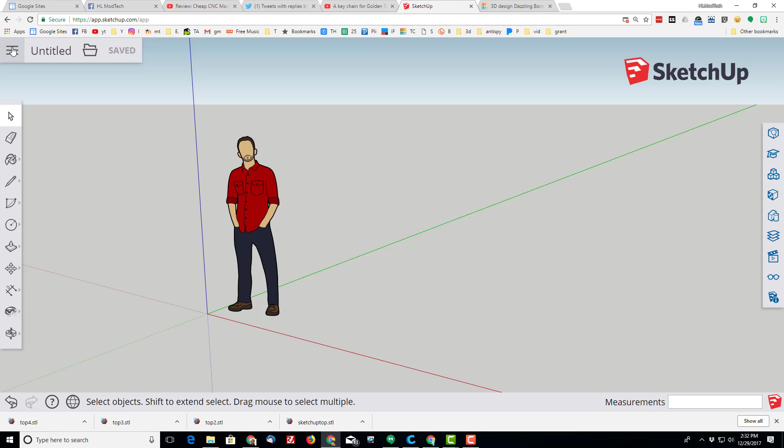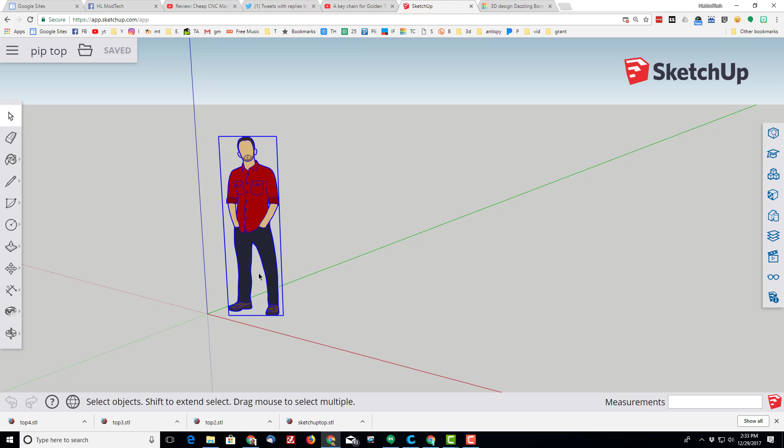This one's going to be a 3D printable project, so make sure that you do new model and get your simple template millimeters so that way it'll print accurately on your 3D printer. We need to give it a name, and I'm going to name it Pip Top, where Pip means print in place. So I'm going to try and build a top that prints in place and does not have any supports. I'm going to click on this gentleman and get rid of him at this point.

I'm going to switch to the circle tool using the tools. Remember, SketchUp is a click and release program. So right now I'm going to click the origin, and then after a little bit of testing, I have found that if I go for a radius of 4 millimeters, that's good enough for me to print with. I then want to click the zoom to extents tool so I can see that cool little circle I made.

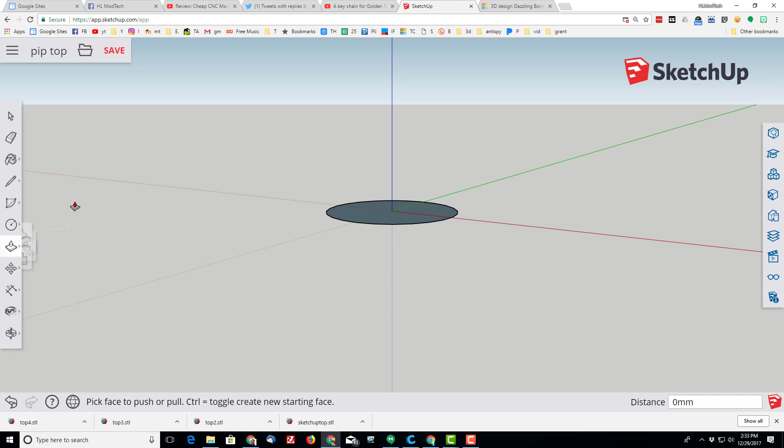I'm going to switch to the push-pull tool, and I would like my handle that I hold to be 25 millimeters high. I am going to use the select tool to grab that entire object, and I'm going to right click and I'm going to make it a group so that it stays together. I'm going to note the red save button and I'm going to hit save.

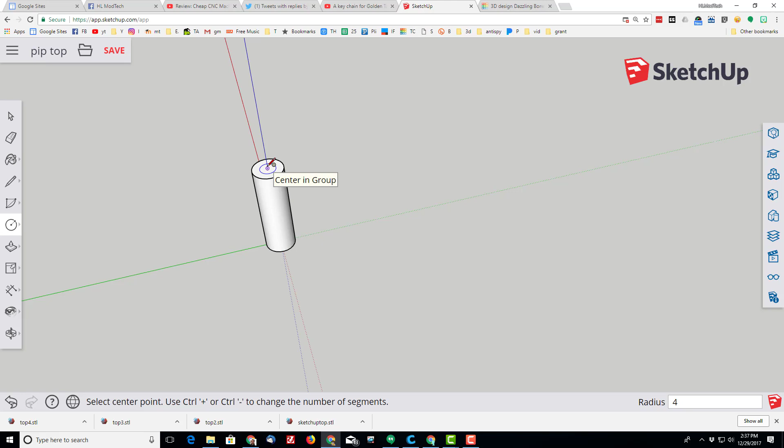And this time I'm going to click right near there. I'm going to hover near the edge so I can snap to the middle. And I'm going to make it exactly 4 millimeters again. I'm going to push-pull that piece up, and I want it to be 10 millimeters high. I'm going to switch to the select tool, and then I'm going to find the amazing scale tool.

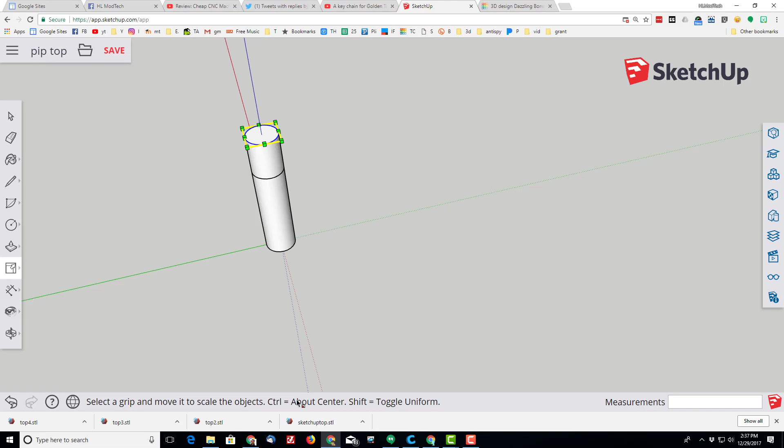And with scale selected, I'm going to toggle uniform, so that means that it goes the same amount in each direction, and then I want it to go around center. And I'm going to pull mine out to 4 times as big. That gives me a nice slope that I can then take a look at using the orbit tool. So you can see that my top will be able to print evenly out and up without requiring any supports.

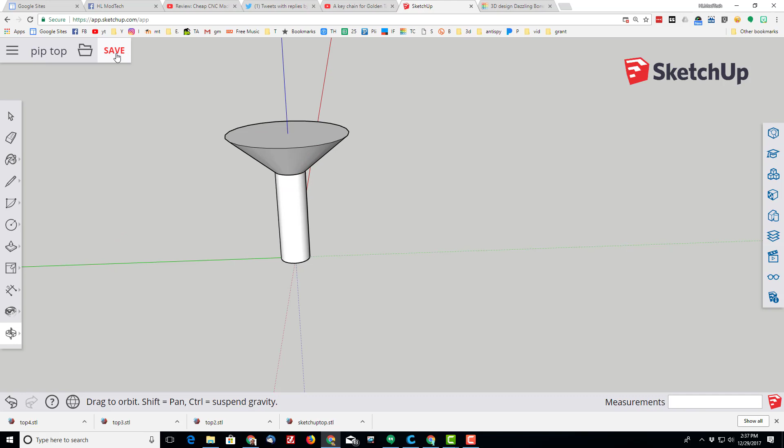I'm going to hit save. I'm going to select those parts. Notice because I drag from the left to right, it only grabs that component. And I'm going to make it a group. Alright, I want to make this so that it's a little rounded before I put the point on it. And I'm going to do that by adding another circle.

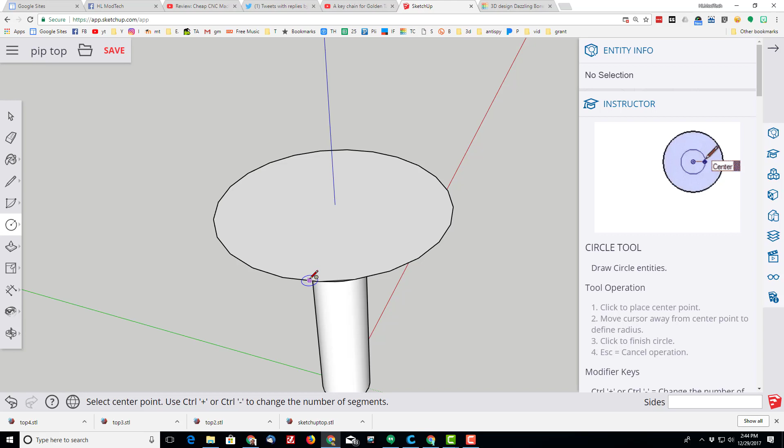I'm going to hover on the edge and that lets me snap to the middle. I'm going to make my circle almost as big as the whole design. And then I'm going to do one other little item to make sure that it's nice and rounded. I'm going to make that 60 segments around. Notice it's a much better curve at this point. I'm going to bring out the push-pull tool and I'm going to push it up 4 millimeters.

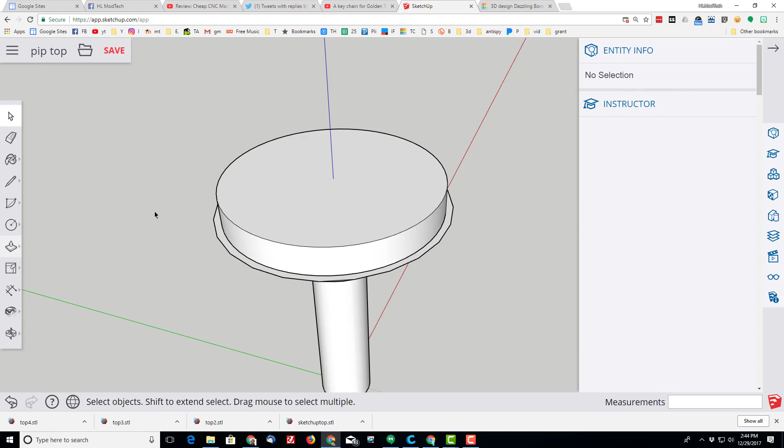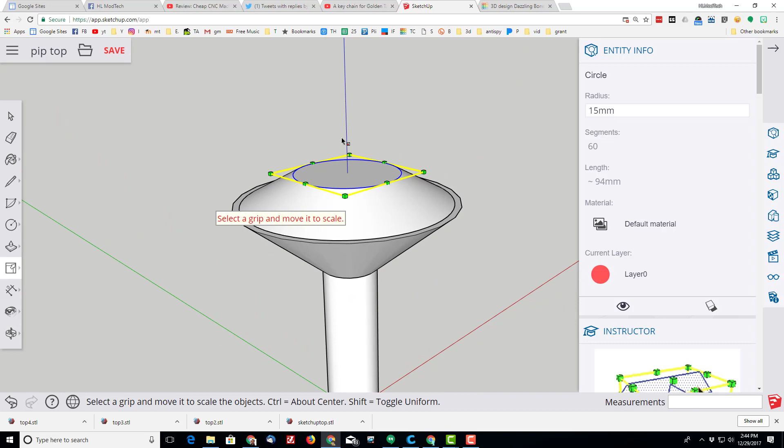I'm going to click on the ring, and then I'm going to choose the scale tool. I'm going to once again turn on shift, and then I'm going to hold down the control key so that it goes about its center, and I'm going to make it down to about half as big as it used to be. That's a decent place for where I'm going to put the point, and it's a nice slope. I'm going to click out here, and then I'm going to grab that entire part. Notice I was touching the other item, but because I didn't grab all of it, it's not selected, and then I can make it a group.

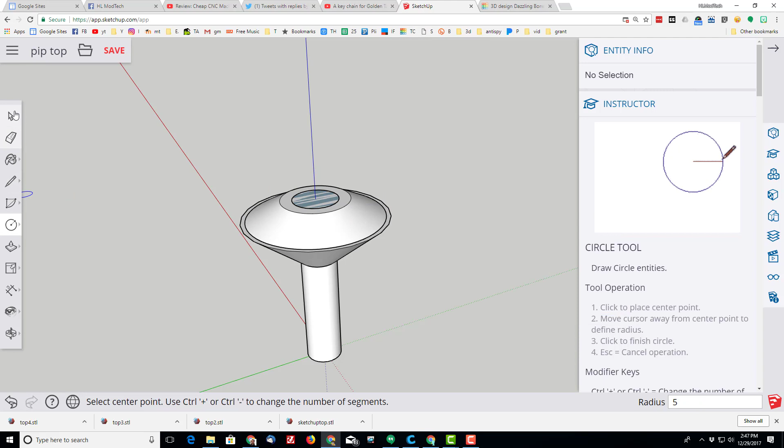Alright, let's add a point to our top, and it is almost ready to print. Click out in space, click back on your circle tool, go to the edge of that circle so that you can then click on the center. I'm going to make it 5 millimeters, but I'm going to do a really cool trick. I'm going to click on the edge of it, and I'm going to change it from 24 segments to 5 segments. So now it's a pentagon.

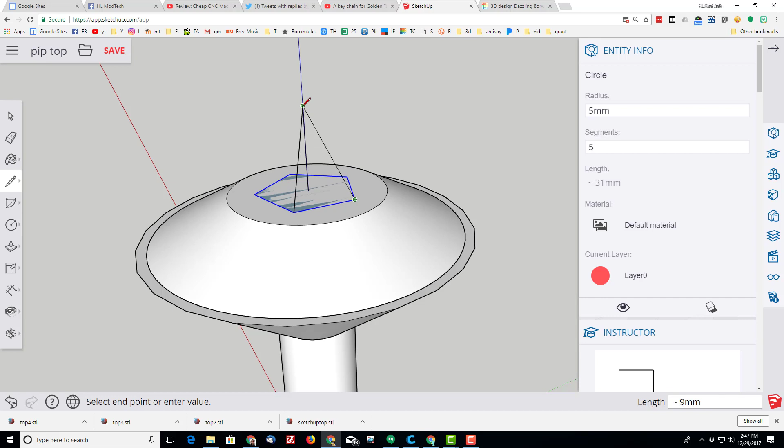And then from my pentagon, I want to go to the edge and then the center. And then on the blue axis, I want to go up 9 millimeters. That lets me connect these faces so that I can turn it into the point that it is going to spin on. I do want to make sure that I get rid of the line on the inside. So I'm going to delete that quick. And then I'm going to go through and connect the rest of them so that it becomes a complete shape again.

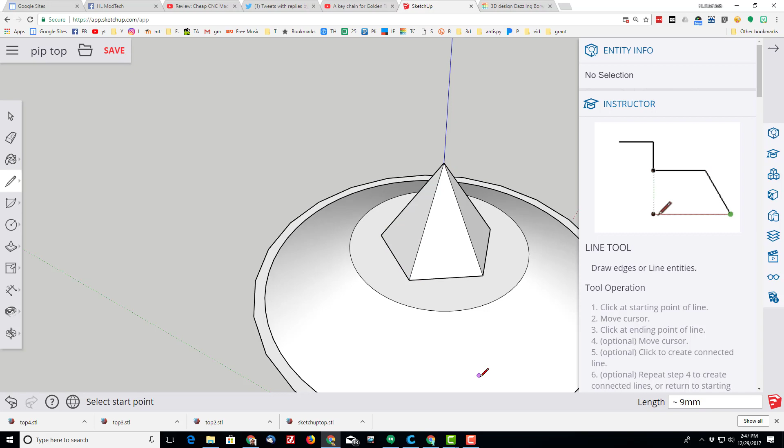So now I have got an awesome top that will print from this base all the way up. I'm going to do the last part where I make that a group as well. Notice because I only partially grabbed all the other pieces, it only gets the one that's on the inside, and I can make it a group. Alright, our top is pretty epic. Let's hit save, and let me show you one more cool thing for when you're adjusting.

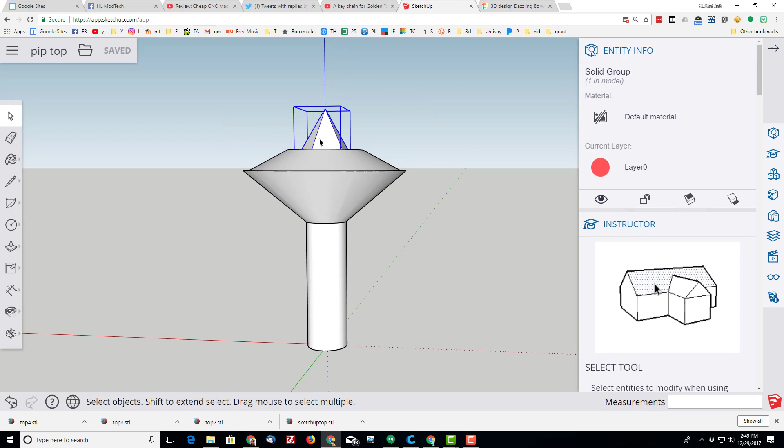Since we grouped all these, they're all individual parts, but if you double click, you can edit them. So right now I've double clicked on our base, and I want to make it skinnier on the part where I will spin it from. So I'm going to click on that ring.

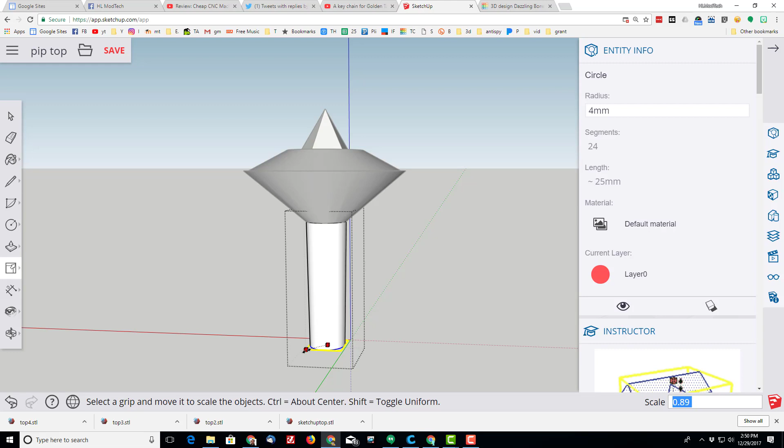I'm going to go back to our scale tool, and then I want you to switch on the uniform by toggling shift, and I'm going to hold control, and I'm going to make it 0.85, or as close as I can get to 0.85 on the scale for how big that is. 0.83 it'll be. Click the select tool and click out in space, and you can see now how it's got a little bit of a ridge or a little bit of a slope and is ready for printing.

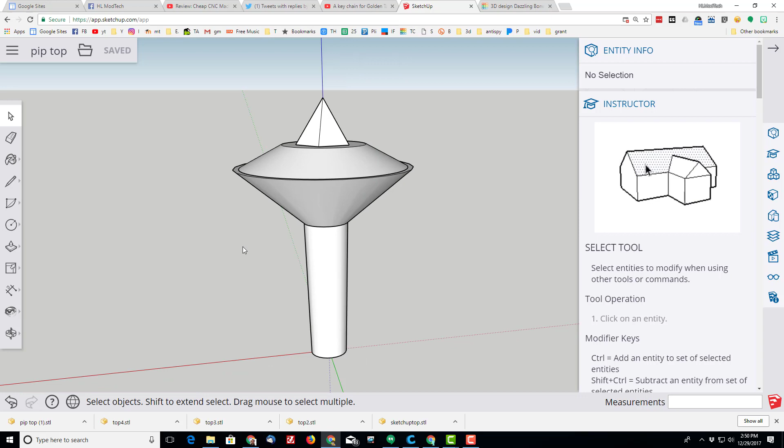Hit save, and then with your item saved you can turn it into an STL by clicking the folder and doing download STL file. Save that to your computer. Mine is PipTop1 because I've made quite a few of these. I hope you enjoyed the lesson.